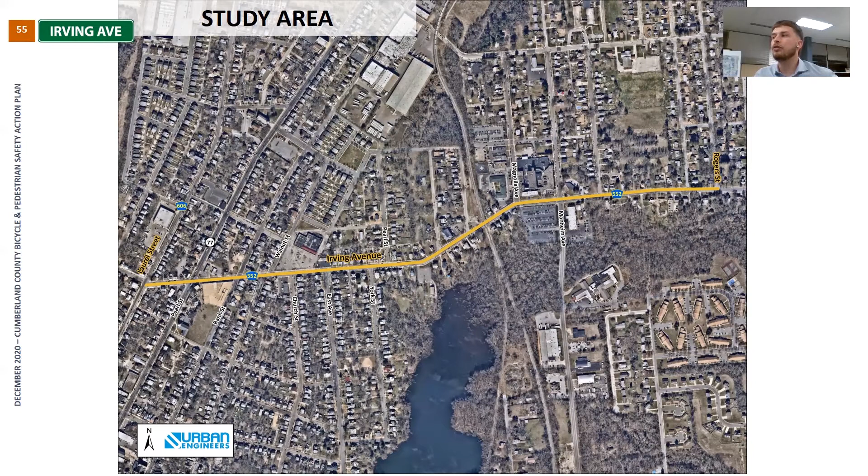The next project location selected within the City of Bridgeton is the Irving Avenue corridor. The Irving Avenue corridor ends at Laurel Street to the west and Rogers Street to the east. This corridor includes two notably popular destinations, the Bridgeton Hospital and the shopping plaza at Walnut Street.

The Irving Avenue corridor has an average daily traffic of over 6,500 vehicles and has a posted speed limit of 25 miles per hour from Laurel Street to Manheim Avenue, whereafter the posted speed limit increases to 35 miles per hour.

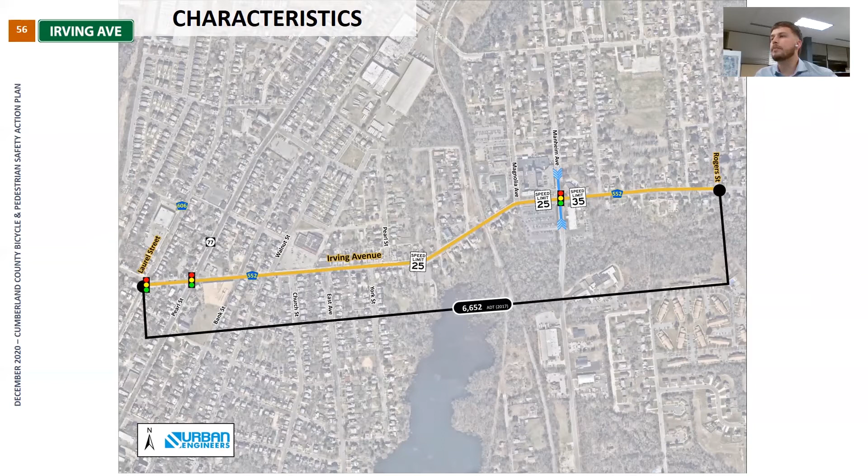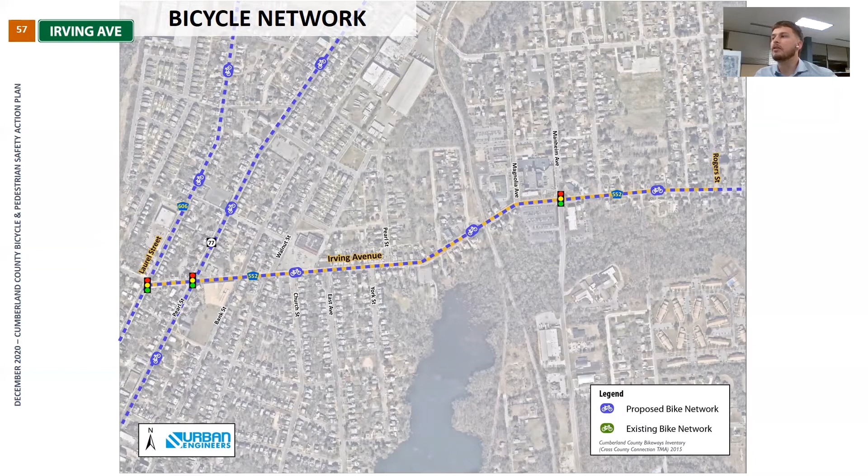The 2015 Cumberland County Bikeway Inventory lists Irving Avenue as being conducive to a future bike network. In its existing condition, there are no on-street bicycle accommodations. However, there is often bicycle traffic seen throughout the corridor.

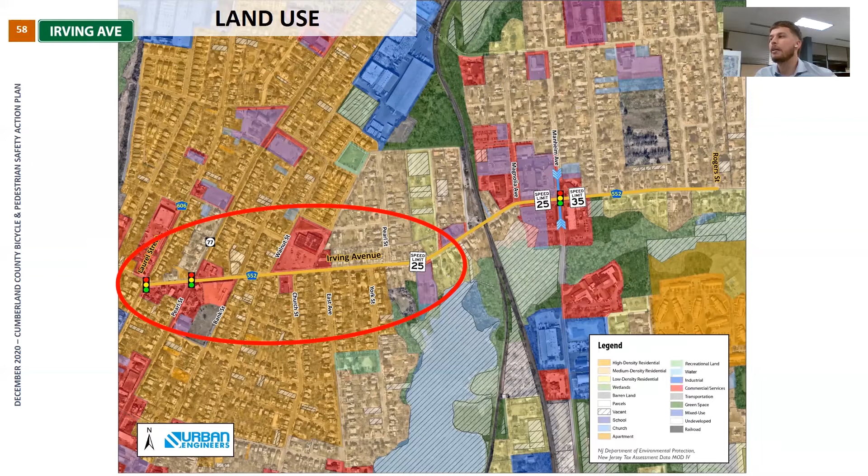The Irving Avenue corridor is less densely populated to the east. However, the corridor changes in character and density as you cross over Manheim Avenue into the East Lake, Northgate, and Commercial Historic Districts. Irving Avenue functionally serves as a gateway route into downtown Bridgeton from the east. Particular consideration must be given to pedestrian and bicycle traffic within the more densely populated areas of the corridor.

According to the data-driven network screening analysis, Irving Avenue corridor was the #1 ranked road segment on the high-ranking crash severity list for Bridgeton. In addition, the intersection of Pearl Street, State Route 77, and Irving Avenue was the #1 ranked intersection on the crash severity list in Bridgeton.

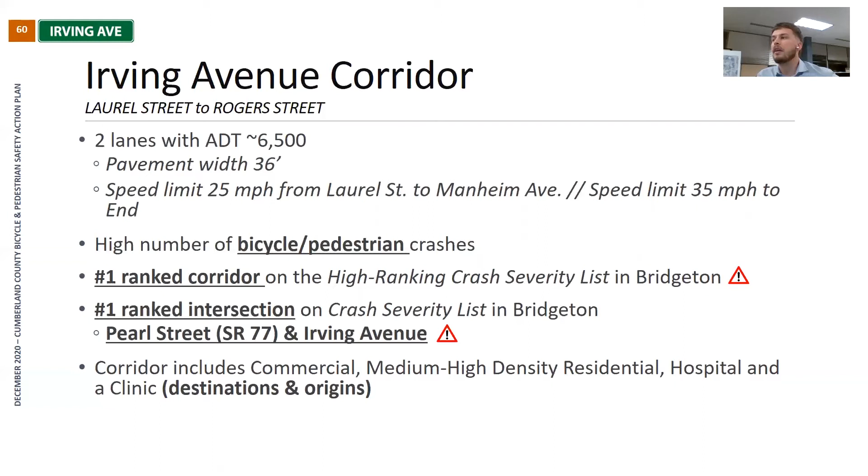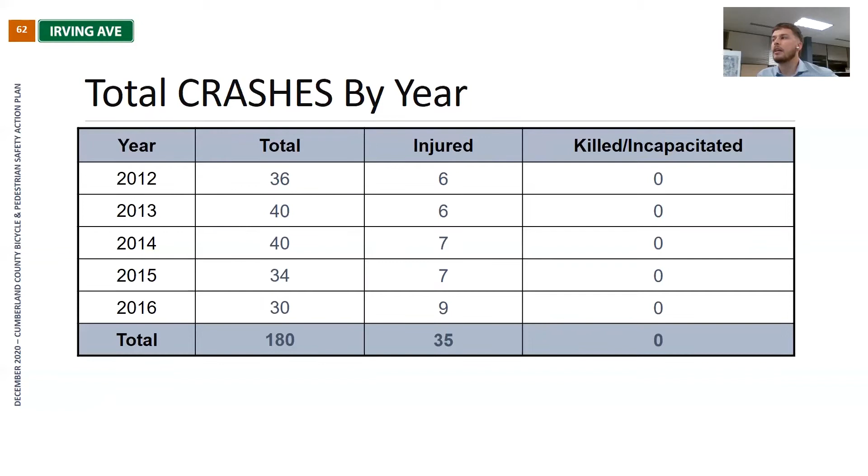Within the project corridor, there were 7 recorded pedestrian or cyclist-related crashes between 2012 and 2016. Altogether, there were 180 total crashes within the project limits. Looking at the number of total crashes within the project corridor by year, we can see that the number of total crashes annually were fairly consistent, averaging about 30 to 40 per year.

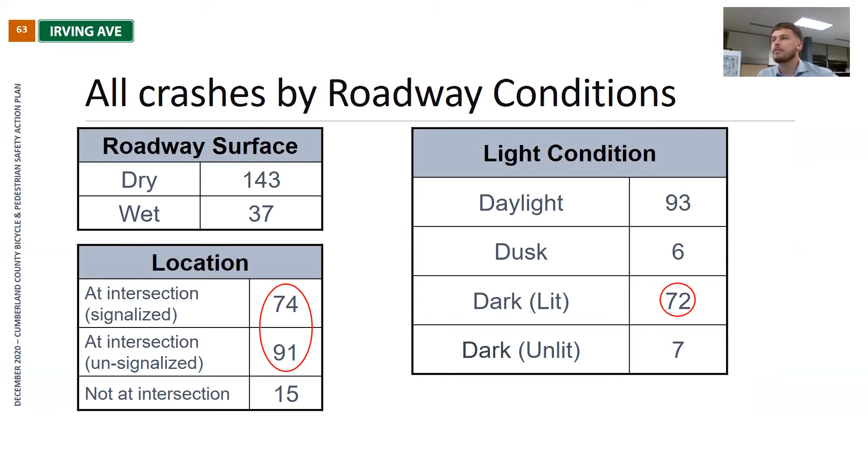Taking a deeper look into the crash data, we can note characteristics or patterns. Crash data shows that a large number of crashes occurred at night. In addition, we can see that the vast majority of crashes within the corridor occurred at intersections. We can see from the crash data that 6 out of 7 pedestrian and bicyclist crashes resulted in some degree of injury.

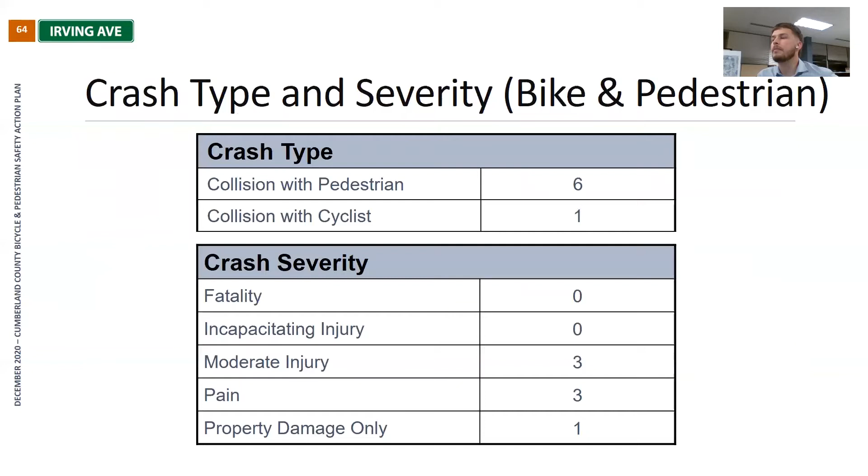In addition to the Atlantic Street corridor, on December 11, 2019, a multidisciplinary team of local, state, and regional agencies also conducted a pedestrian and bicycle-focused road safety audit of Irving Avenue. This event helped to confirm perceived safety issues while also providing greater context. This event allowed for the multidisciplinary team to assess the corridor and provide their recommendations for solutions to found issues.

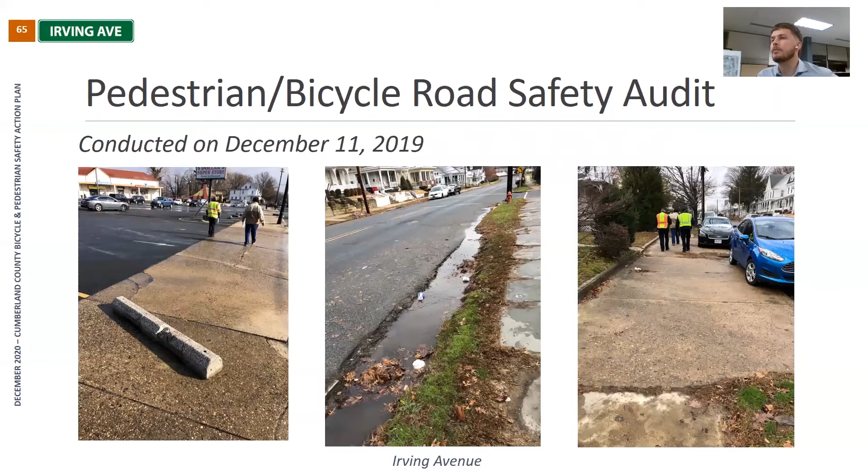This process led to the following general findings. The major contributing factors for crashes in the Irving Avenue corridor were a lack of marked crosswalks across Irving Avenue, vehicular traveling speeds, inadequate lighting and sight lines, left turns, and on-street parking.

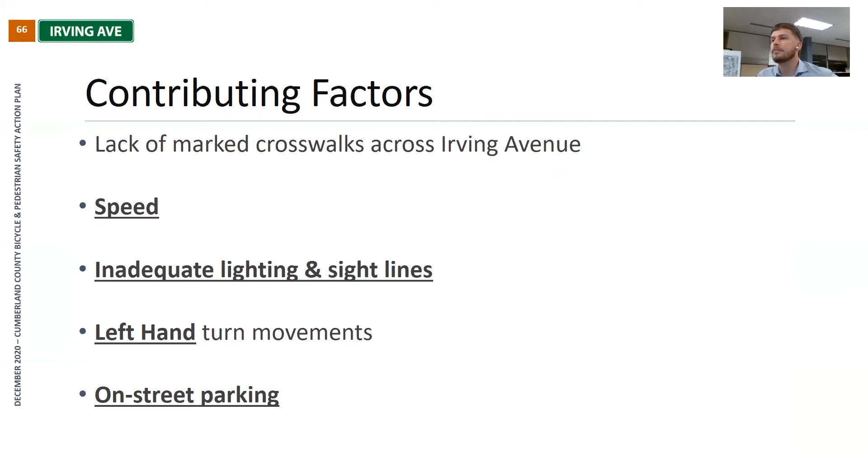Safety improvements. Crash data from the New Jersey Department of Transportation's Safety Voyager database shows that the 3 major crash types within the Irving Avenue corridor are struck parked car, right angle, and rear end. 28% of all crashes within the corridor involve parked cars.

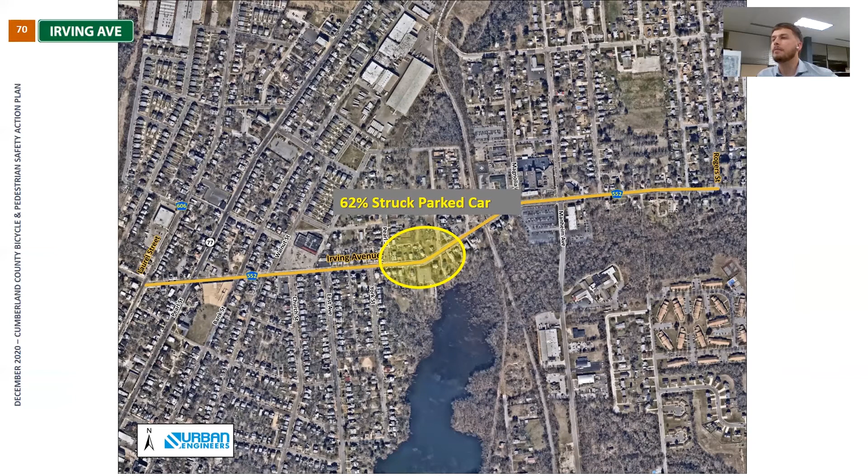The highest concentration of struck parked car crashes were found within this area. Why is this the case? On-street parking is allowed along Irving Avenue with the exception of a select few specific areas. Parking is also permitted within the intersection of Lakeview Avenue and Irving Avenue. However, this is not a recommended best practice.

Due to the lack of roadway width and the tendency of crashes occurring as reflected by crash data, residents within this area often choose to illegally park on the sidewalk so as to avoid being struck by passing motorists.

The second most prevalent crash type within this corridor is right-angle crashes at 20%. There are numerous driveways, alleyways, and roadways that intersect within close proximity of each other in this area of the corridor. This area is also heavily trafficked by foot and bicycle traffic. Residents and children can often be seen walking and biking in this area.

The Irving Avenue roadway bends at two locations, here and here. The curvature of the roadway appears to contribute to adjacent crash clusters. It is important to provide a safe pedestrian and bicycle network and to add additional safety enhancements where appropriate. The prevalence of pedestrian and bicyclist right-angle crashes within this area denote problems with speeding and visibility.

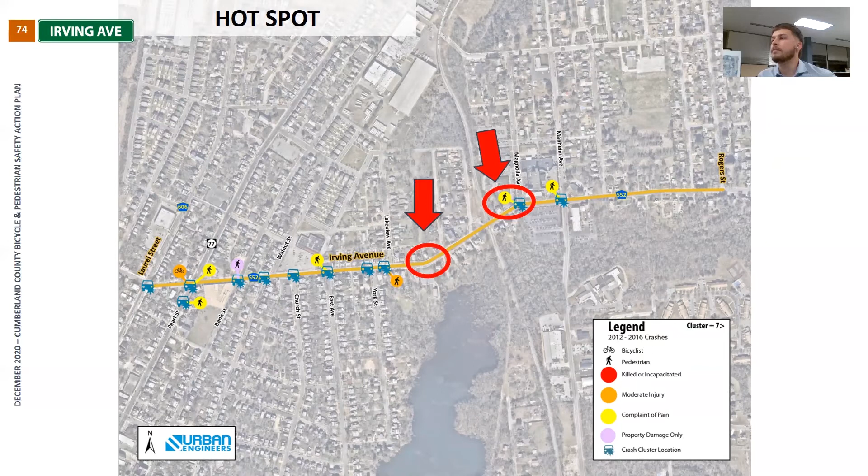To address the aforementioned traffic safety issues within this area and to promote a more walkable downtown area, traffic calming measures have been proposed. This area makes up the southernmost portion of the Lakeview Avenue, Irving Avenue intersection. Residents often park on the sidewalk in this area so as to avoid being struck by a vehicle.

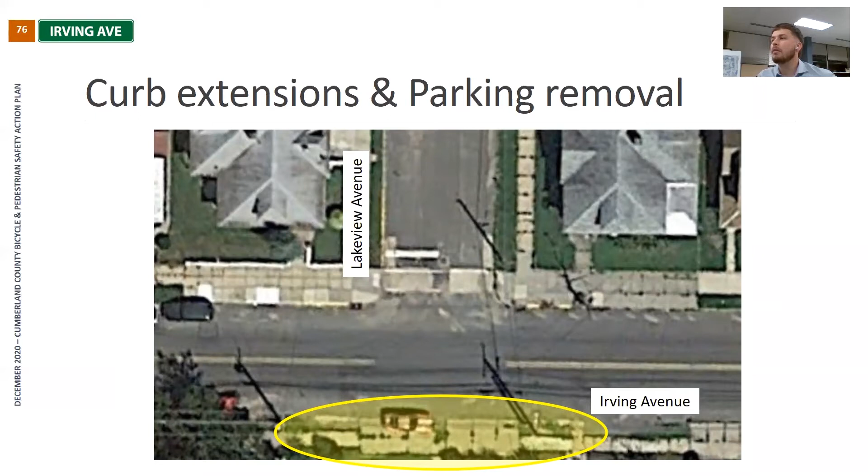Due to the lack of parking lane width and adjacent bend in the roadway, it is recommended that parking be removed from this area and replaced with curb extensions to slow the speed of motorists entering downtown Bridgeton, creating a traffic calming effect by providing a visual and physical indication that motorists should no longer be driving 35 miles per hour, but rather 25 miles per hour. These curb extensions also help to shield parked cars from vehicles approaching from the bend in the roadway.

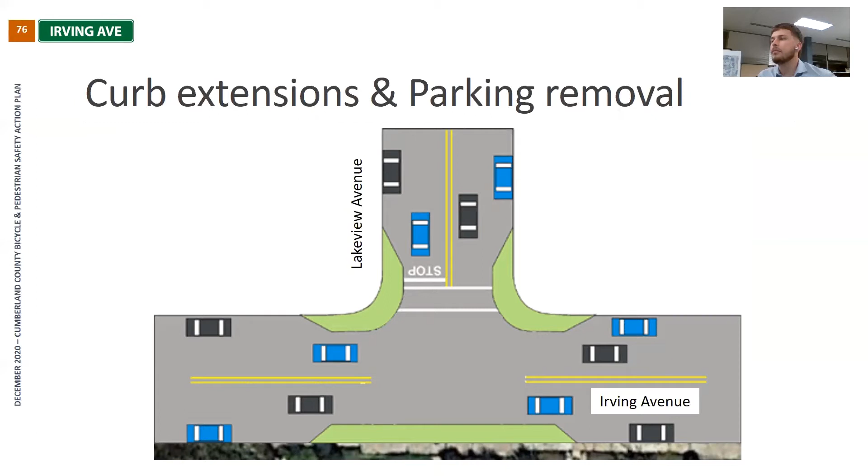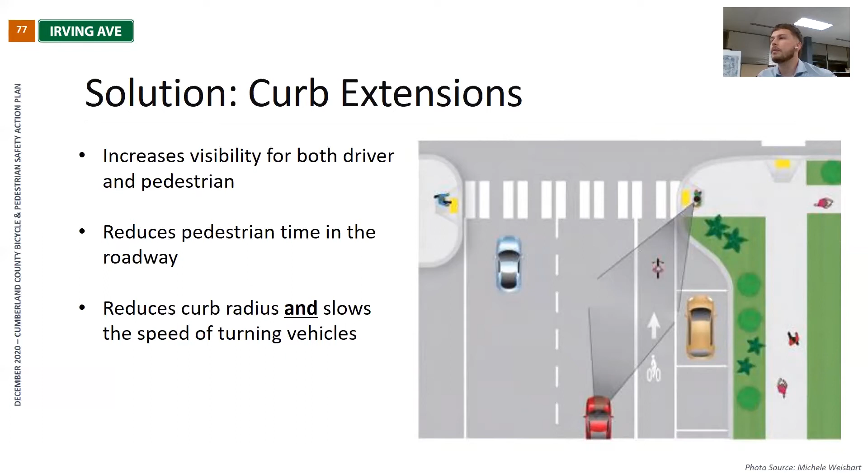Curb extensions also increase visibility for both drivers and pedestrians, while reducing the distance needed for pedestrians to safely cross Irving Avenue. Curb extensions reduce the radius of the curb, which causes vehicles to turn more slowly. Curb extensions, also known as bump outs or neck downs, reduce the effective street width at pedestrian crossing locations by extending the sidewalk and curb line into the parking lane.

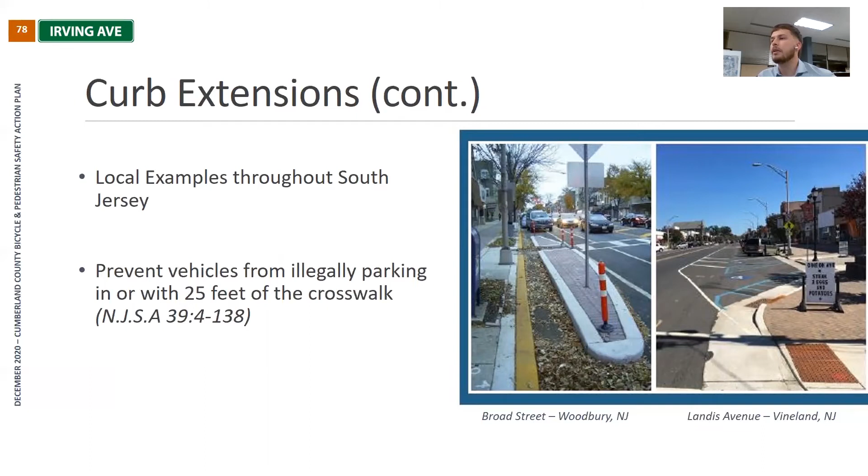Curb extensions help to improve safety by reducing pedestrian crossing distances, visually and physically narrowing the roadway, improving visibility between pedestrians and oncoming motorists, and preventing vehicles from illegally parking in or near crosswalks. Curb extensions shield on-street parking at the intersections and do not reduce parking supply. Installing a curb extension is often referred to as daylighting an intersection due to the significant improvement in visibility. In order to improve the safety of the Irving Avenue corridor, curb extensions have been proposed at the following intersections.

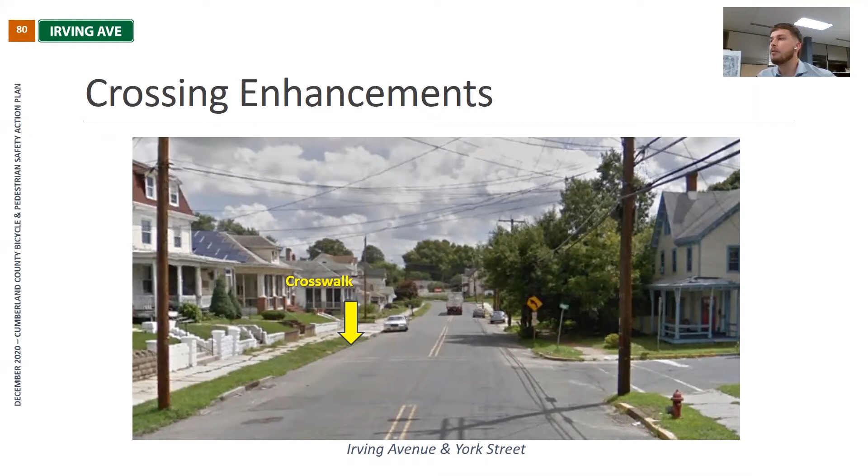This picture shows a faded basic lateral marked crosswalk across Irving Avenue at York Street. Currently, there are very few marked crosswalks provided within the Irving Avenue corridor. In contrast to basic crosswalk markings, which consist of two transverse lines, high visibility crosswalk markings, also known as ladder or continental markings, feature a longitudinal striping pattern.

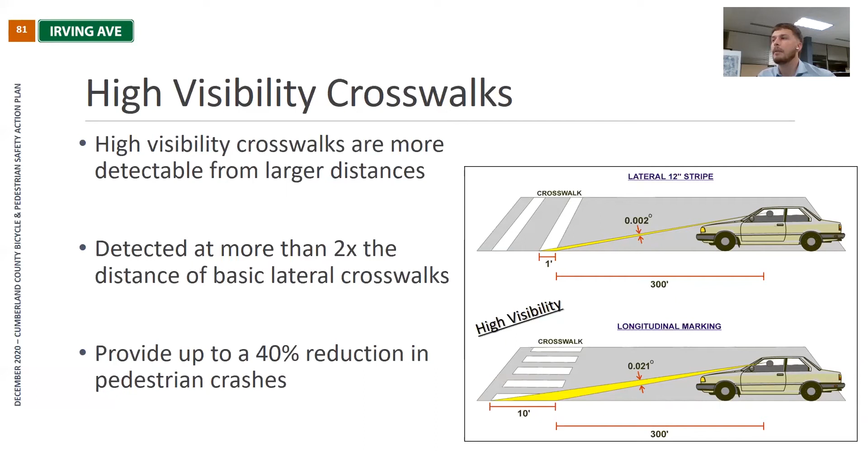This pattern is more visible to oncoming motorists and helps to highlight the crossing location, discourage drivers from encroaching into the crosswalk, and reinforce the driver's requirement to yield to pedestrians. High visibility crosswalks have been shown to reduce pedestrian crashes by up to 40%. High visibility crosswalks have been proposed at the following intersections. Marked crosswalks will only be provided across Irving Avenue at signalized intersections and select locations where crossing enhancements have been installed in conjunction.

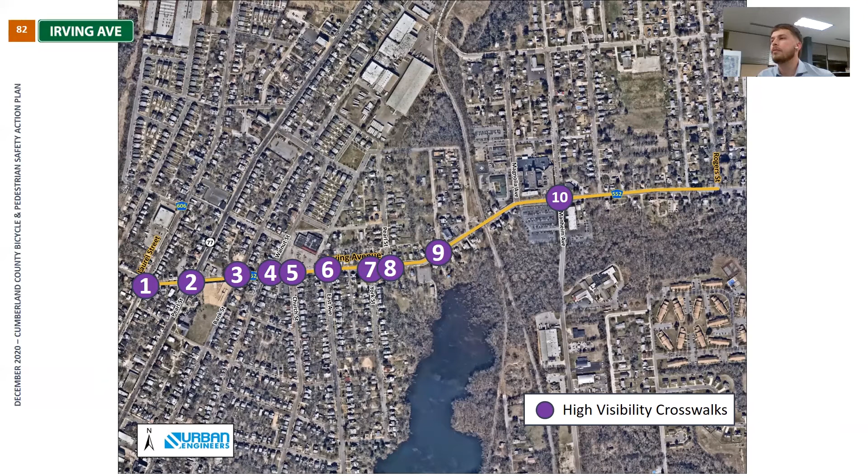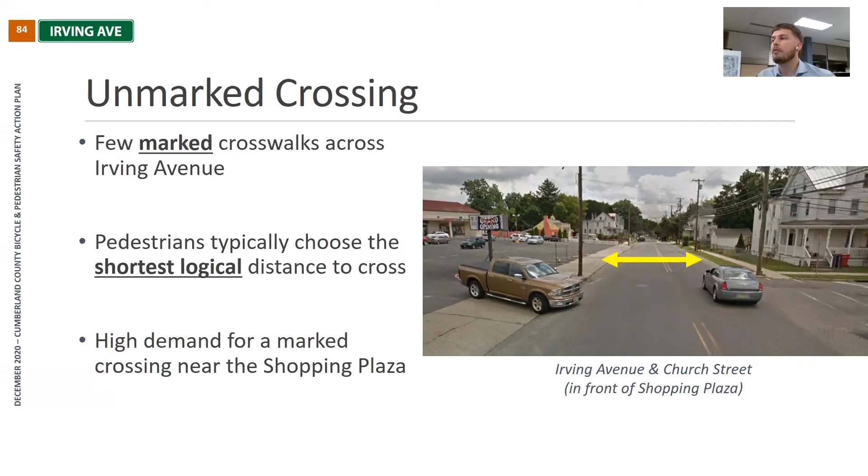However, the pavement does not indicate a clear crossing location for pedestrians, nor does it reinforce the driver's requirement to yield to pedestrians. Bridgeton Hospital visitors, guests, and employees are encouraged to cross Irving Avenue to go to and from the hospital parking lot by using the high visibility marked crosswalk at Magnolia Avenue. While this crosswalk is highly visible, it is often not acknowledged by approaching motorists.

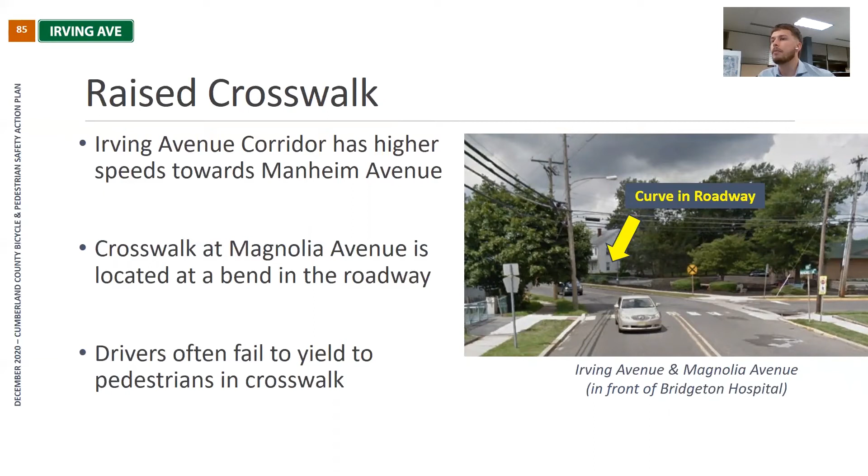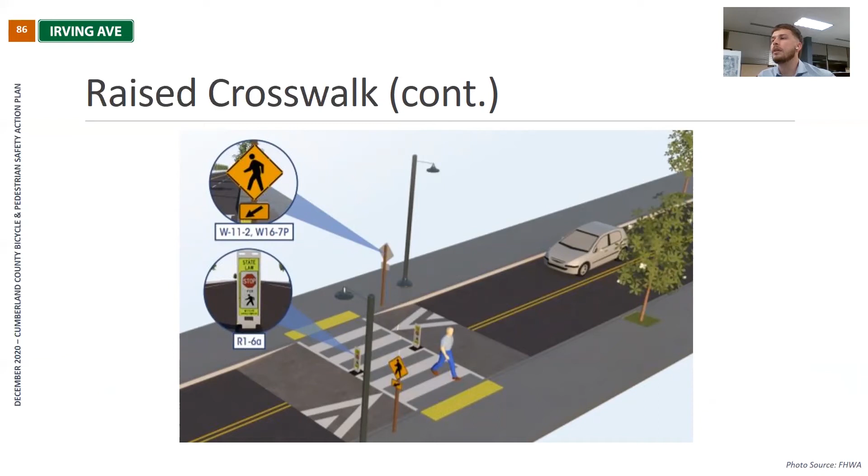The posted speed limit of Irving Avenue in the immediate area changes from 35 miles per hour to 25 miles per hour. However, motorists often do not decrease their traveling speed until after they have passed the crosswalk. Raised crosswalks are ramped speed tables spanning the entire width of the roadway. This crosswalk acts as a traffic calming measure, allowing the pedestrian to cross at grade with the sidewalk while reducing vehicle speeds. Raised crosswalks can reduce pedestrian crashes by up to 45%.

There are two pedestrian beacons that communities can use to improve the visibility of pedestrians crossing a busy roadway: the pedestrian hybrid beacon and rectangular rapid flashing beacon. A pedestrian hybrid beacon, or PHB, is a traffic control device designed to help pedestrians and bicyclists safely cross multi-lane or higher speed roadways. The beacon rests in dark until activated. Once it is activated by pushing a button, the beacon displays a sequence of flashing and solid lights that indicate when pedestrians should cross and when it is safe for drivers to proceed.

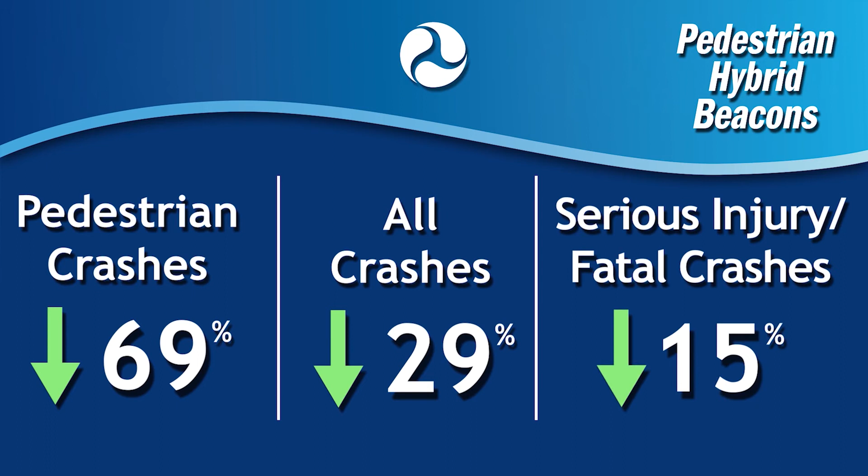PHBs are best suited for uncontrolled intersections with high vehicle speeds or volumes and must be accompanied by a marked crosswalk. PHBs are also typically less expensive to implement and maintain than standard traffic signals and provide a wealth of safety benefits, such as a 69% reduction in pedestrian crashes, a 29% reduction for all crash types, and a 15% reduction for serious injury and fatal crashes.

Rectangular Rapid Flashing Beacons, or RRFBs, alert motorists of crossing pedestrians at uncontrolled crossings. They remain dark until activated by pedestrians, at which point they emit a bright, rapidly flashing yellow light. RRFBs differ from PHBs in that an RRFB increases the visibility of the pedestrian and highlights the need to yield, whereas PHBs direct vehicles to stop. Studies have shown that motorist yielding can be increased from 18 to 81% compared to the standard pedestrian warning sign treatment, and they are less costly to install than other beacons.

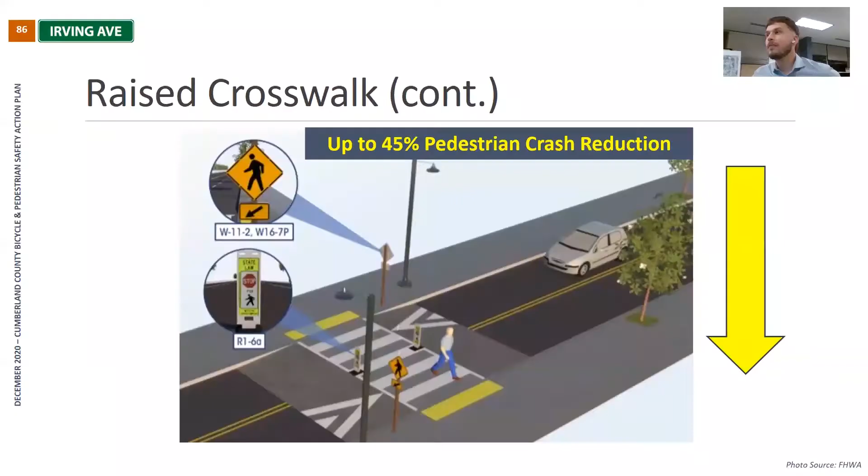The demand for crossing enhancements on Irving Avenue has led to a mid-block marked crosswalk being proposed within this segment of Irving Avenue, here and here. Shown here is an example of what the mid-block crossing enhancement could look like once installed. In addition, a raised marked crosswalk has been proposed at Magnolia Avenue.

Segments of existing sidewalk within the most historic areas of the project corridor have deteriorated over decades. While pieces of the sidewalk network have been replaced ad hoc, there still exist many segments of the sidewalk that have heaved and/or have disappeared altogether. This presents tripping hazard concerns and does not provide accessibility to Americans with disabilities.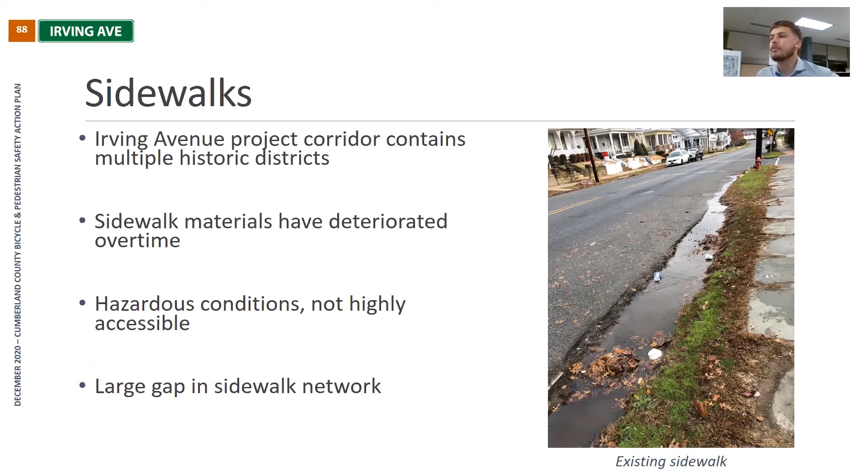In addition to the aged sidewalk network, there's also a gap in the continuous sidewalk network between Manheim Avenue and Rogers Street. New sidewalk and improved sidewalk segments have been proposed for these specific areas. Sidewalks have shown to decrease pedestrian crashes by up to 89% when compared to roadways without them.

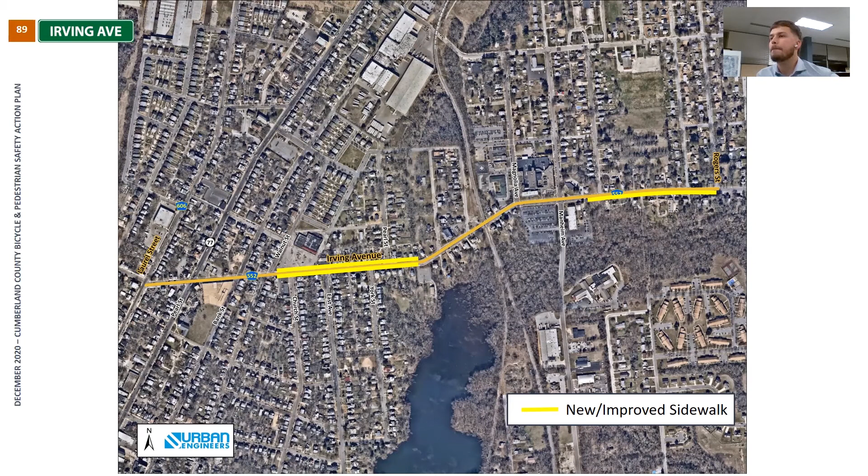The third most prevalent crash type within the corridor is rear-end crashes at 12%. Common factors contributing to rear-end crashes include driver inattention or distraction, tailgating, panic stops, and reduced traction due to wet weather or worn pavement. Backplates added to a traffic signal improve the visibility of the illuminated face of the signal by introducing a controlled contrast background.

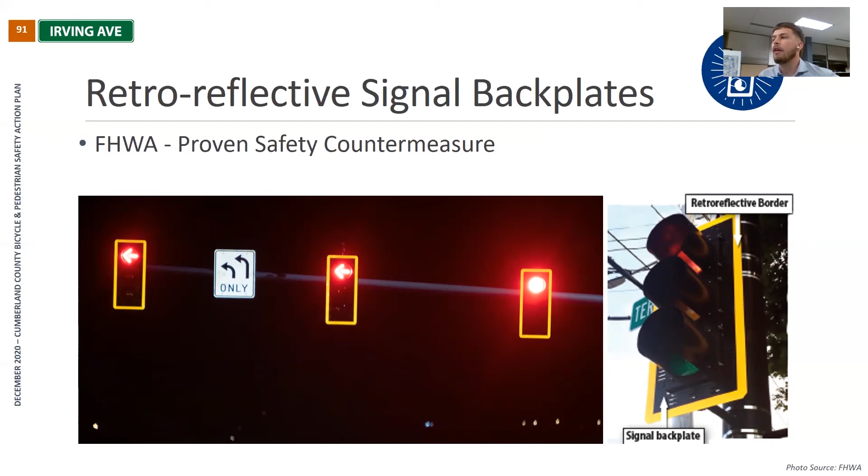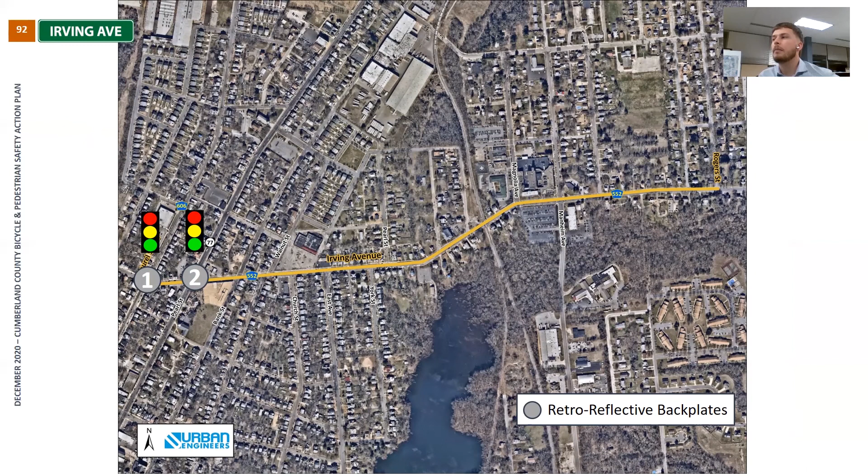Signal heads that have backplates equipped with retroreflective borders are more visible and conspicuous in both daytime and nighttime conditions. Retroreflective backplates are designated as a proven safety countermeasure by the Federal Highway Administration and have shown to decrease all crash types by up to 15%. Retroreflective backplates have been proposed for the following signalized intersections with high number of rear-end collisions and other crash types.

One proven safety countermeasure, a leading pedestrian interval, or LPI, is a traffic signal timing adjustment that gives pedestrians the opportunity to enter an intersection 3 to 7 seconds before vehicles are given a green light. By giving pedestrians of all abilities a head start, LPIs improve the visibility of crossing pedestrians and allow them to better establish their presence in the crosswalk, thereby increasing the chances that motorists will yield to them. This is especially beneficial for persons with disabilities, the elderly, and less mobile pedestrians.

Since LPIs only require modifying existing signal timings, they are simple to execute and of very low cost. LPIs have shown a 59% reduction in pedestrian crashes at intersections and significantly helped increase the safety of crossing pedestrians.